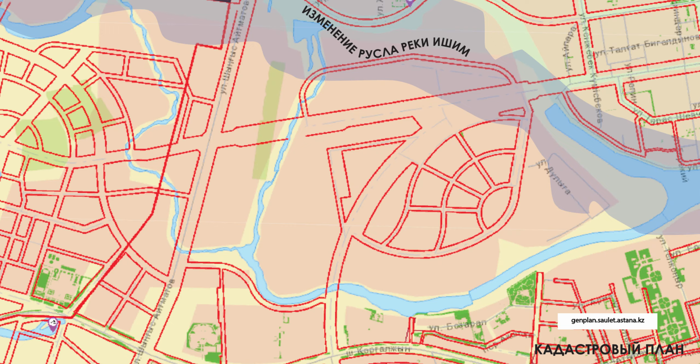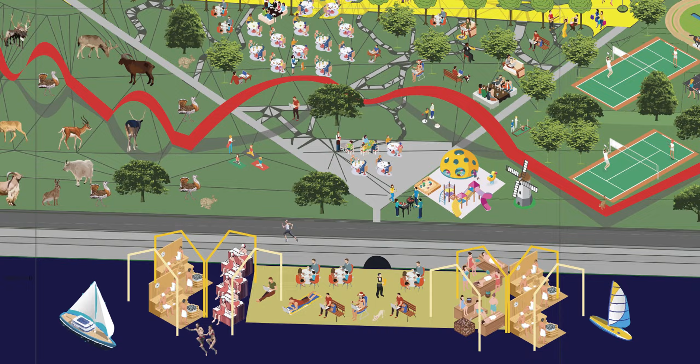If you compare the Google Maps graphical layer with the satellite imagery, and then with the red lines of the Astana master plan, you'll quickly notice that the street layouts and locations of water bodies differ among them. This is because recently the Ishim River's course has been altered and straightened in this area to mitigate flooding and elevate marshy terrain. The designated area encompasses 12.5 hectares next to Shevchenko Keshesi.

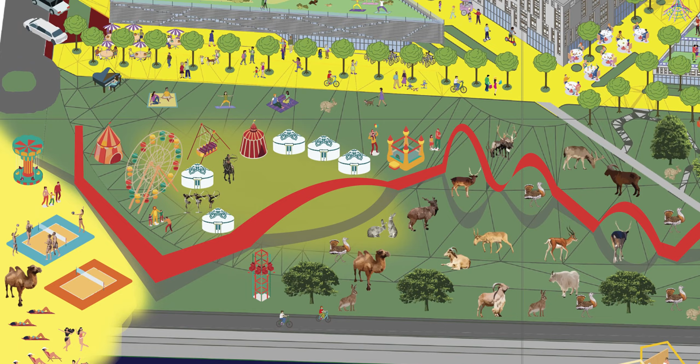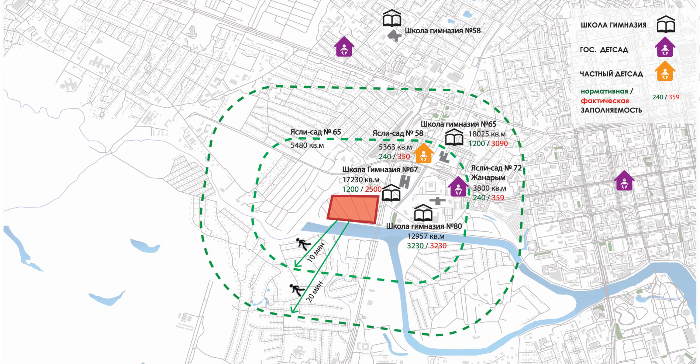In this newly developed area, school education options are quite limited, mainly because of its predominantly rural and industrial nature. The schools within a 20-minute radius of the site are already operating at 1.5 times their intended capacity. As a result, the project includes plans for an all-stage kindergarten and school to address this need.

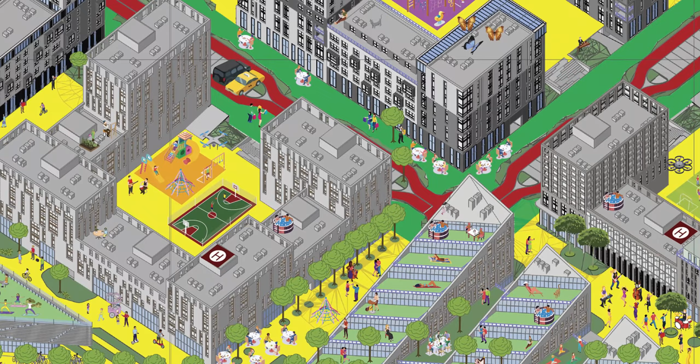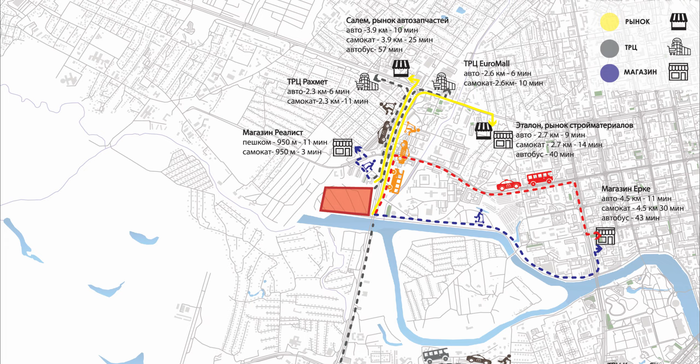The nearest food and supermarkets are at least 1 kilometer away and are more easily accessible by car than on foot, particularly during the 5-month-long winter. This necessitates the inclusion of various retail outlets in the project, ranging from small shops to a large mall.

Urban voids have emerged as the most significant revelation in urban studies. The site is essentially isolated from the rest of the city's vibrant areas by 8-lane highways, extensive parking garages, the river, and various private, fenced-off spaces.

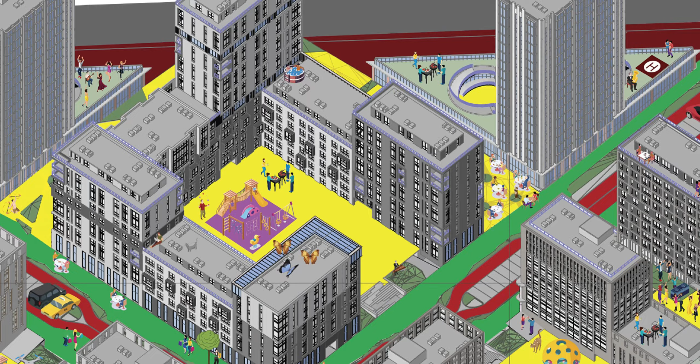Given the challenge of altering the car-oriented policy, the project aims to replicate the full spectrum of a modern city's diversity within the site itself, bringing a rich, vibrant life to its residents.

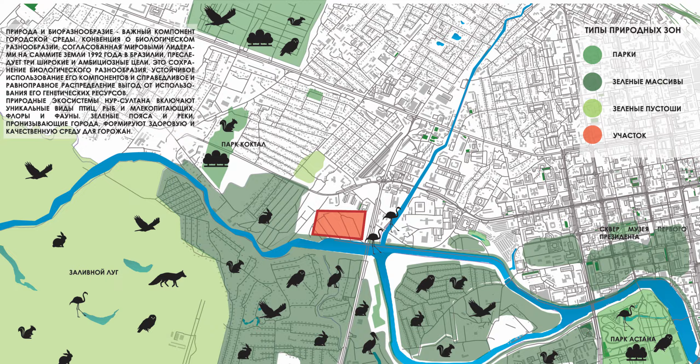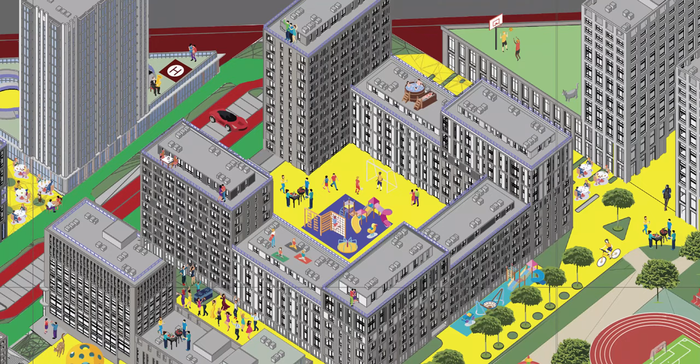The waterfront location is a key spot within the Ishim Emerald network, indicating that this area acts as a migration path for wild animals, especially flamingos. Implementing nature-based solutions will allow us to seamlessly incorporate natural elements into the project.

Marketing research has highlighted a diverse array of residential projects by class, showing that the area is on the outskirts and predominantly surrounded by affordable housing options.

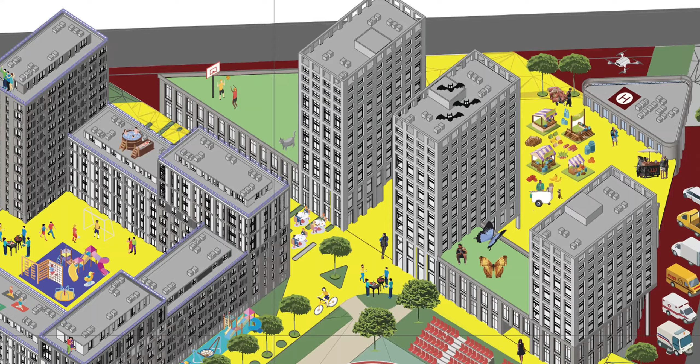The syntax analysis in the marketing study of similar real estate projects in Astana has identified 6 key blocks of values that the project aims to prioritize: location, safeguard, underground or built-in parking, and bicycle storage; landscape design, customized apartment layout, smart home system, eco and soundproof materials, low and middle rise, diverse facade design, panoramic glazing, multi-level water filtration.

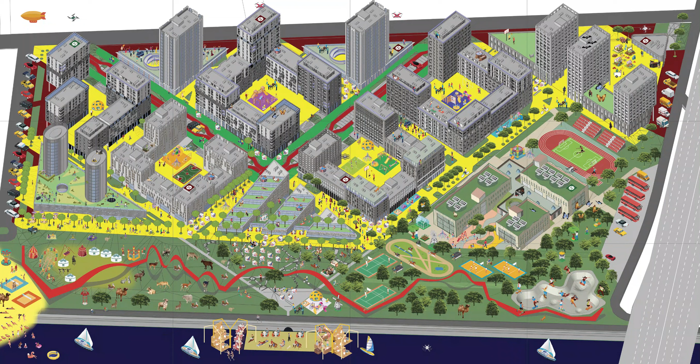Ceramic brick, swimming pool, fitness, pedestrian green zone, barbecue, and large lobby, kids playground and room, stroller storage, artificial pond, and boat pier, ground floor commerce, condominium management services, 24/7 concierge, recognition for design excellence, and community of wealthy neighbors.

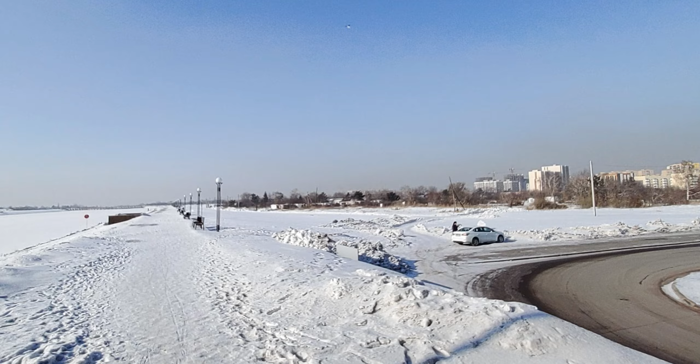The urban strategy of Riverside Astana is built around 7 core values: waterfront, cultural cluster, new home unit typologies, nature-based solutions, mixed use, micro-mobility, and underground parking lots.

Initially, the project started with a 9.2-hectare area, but we had to allocate 2.2 hectares of that for a public school. We then divided the remaining area into 6 full blocks and 4 half blocks, inspired by the famous block design of Barcelona. As a result, we achieved a floor area ratio, FAR, of 2.93, a density of 400 inhabitants per hectare.

137,000 square meters dedicated to residential spaces, and 16,000 square meters for commercial use, expecting around 2,800 people to live in this community.

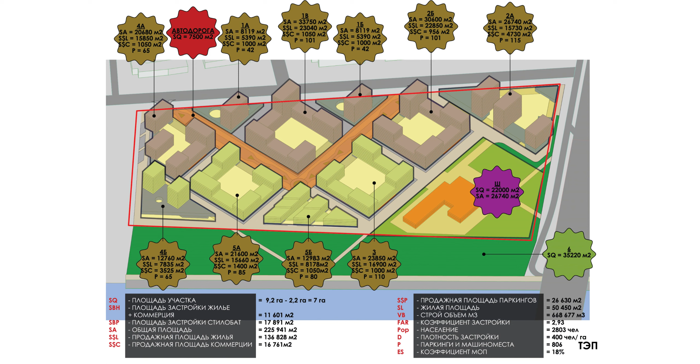The apartmentography scheme provides a range of options for residential units, categorized by area, class, and block. Meanwhile, the economy scheme visualizes a data of the expected economic value of real estate assets, sorted by type and block.

The construction development roadmap outlines the essential steps in business planning, including the allocation of shares in light of a gradual price increase, the phases of construction, investments, risk management, return on investment, and related development activities along the waterfront.

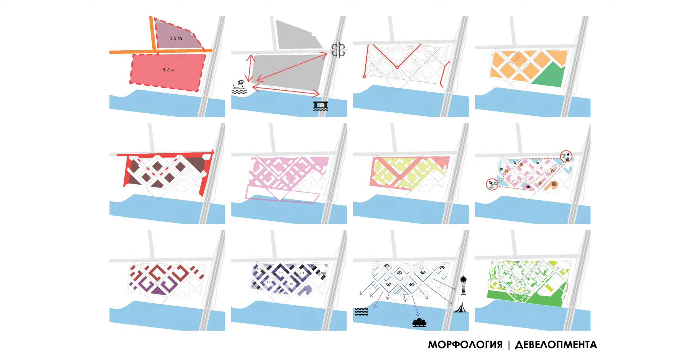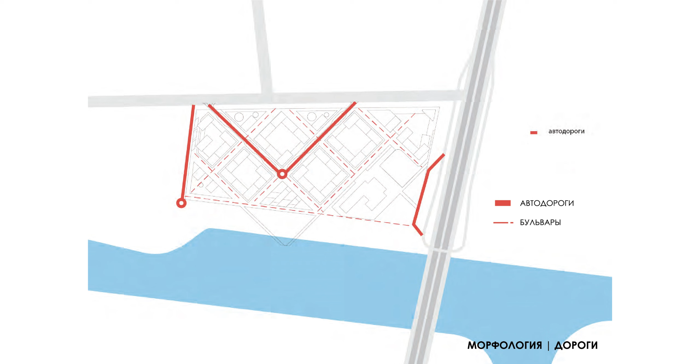Morphogenesis of urban blocks is explained in 12 steps. 1. The project boundary and its probable expansion northward. 2. Main connections. 3. Internal roads. 4. Blocks. 5. Car parking areas.

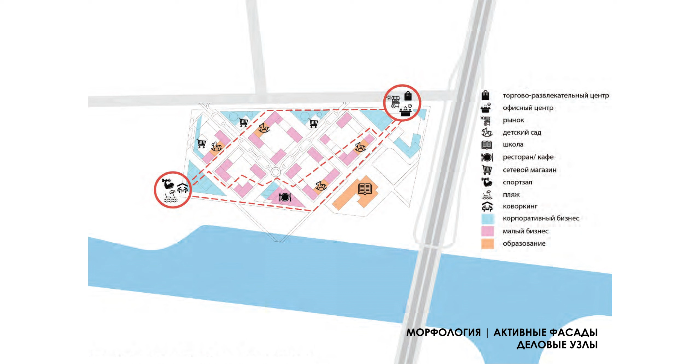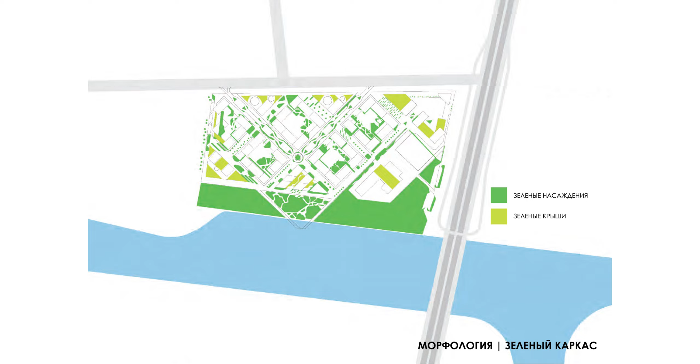6. Pedestrian areas. 7. Public and private space. 8. Active ground floors. 9. Real estate standards. 10. Floors. 11. Viewpoints to the water and downtown. 12. Green network. Thus we see the site master plan, and the zoning plan where commercial units are inbuilt in the perimeter blocks, and the wide waterfront includes temporary structures only.

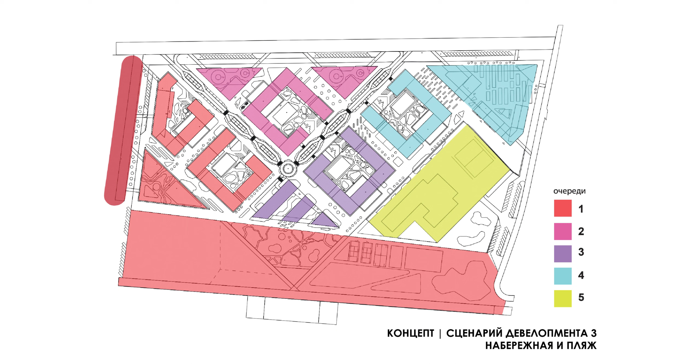The scheme of development priorities lays out 3 possible scenarios, starting from the northeast with the large mall, building from the north with the adjacent street and 3 high-rise blocks, and finally, from the west with blocks and the waterfront area. Plans for car transit and parking, micro-mobility, and nature-based solutions outline the key principles behind the urban design.

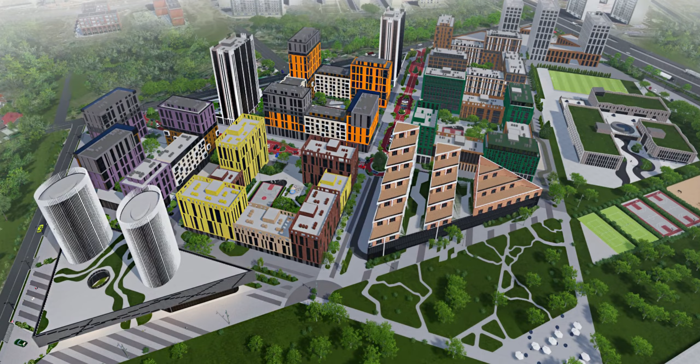Shadow analysis was instrumental in adjusting the building volumes, ensuring more sunlight could penetrate the blocks. Through visibility analysis, we identified multiple viewpoints overlooking the waterfront.

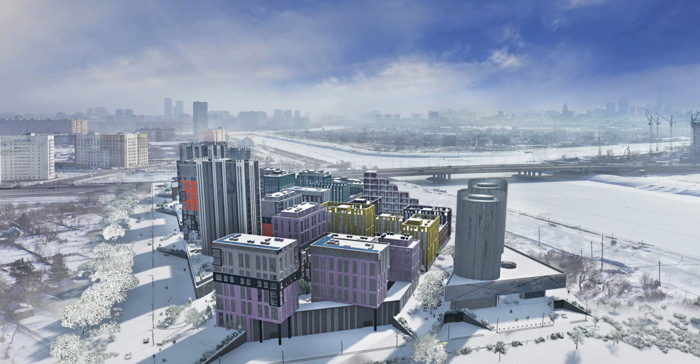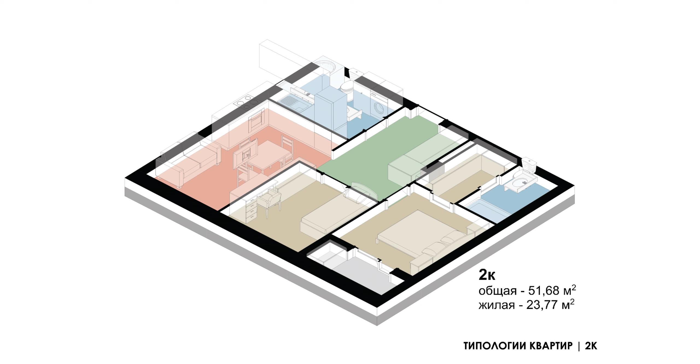In designing the pilot block plans, our goal was to minimize space waste of common areas and introduce a diverse range of apartment types. To accomplish this, we introduced loft units on the ground floor with small gardens, duplex apartments on the rooftops, and optimized the layouts of the housing units. Here, you can see the typical layouts for 1, 2, 3, and 4-room apartments, as well as loft units.

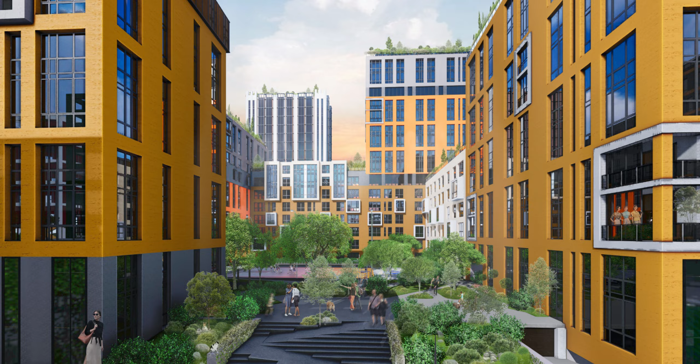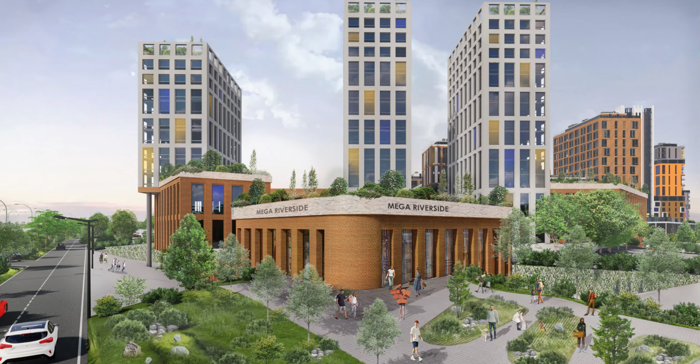The architectural outlook for the future neighborhood incorporates the use of prefabricated brick, concrete, and glass for the facades, along with a broad implementation of green roofs, patios, and enclosed inner courtyards. A unique aspect of the design is the provision for snow removal vehicles to access pedestrian streets and inner courtyards, as well as the efficient drainage systems for both roofs and street surfaces.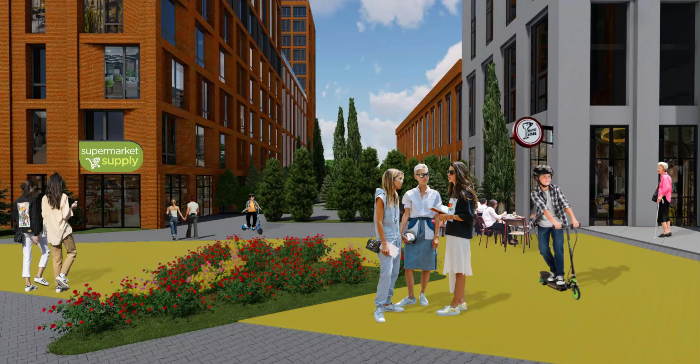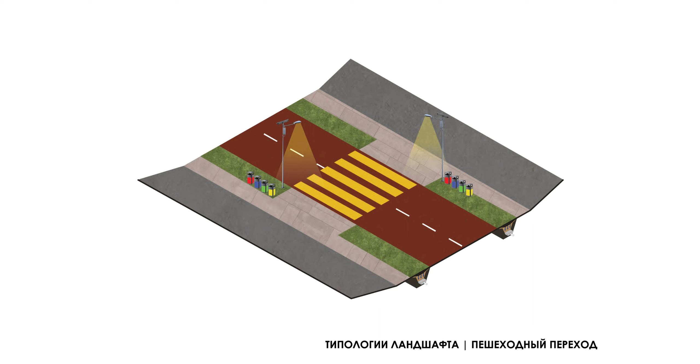The different color street pavements indicate the designated areas for vehicle movement and pedestrian use. The landscape typologies lay out the fundamental concepts of urban design: outside street sidewalks, guest parking lots, roundabouts, crossing of car and pedestrian street, driveway to underground car parking, kindergarten next to pedestrian street, pedestrian crossing, underground waste segregation containers, waterfront walkway, inner court sport fields, inner court playgrounds, and park cafe.

The street hierarchy helps visually distinguish the areas designated for walking, biking, driving, and parking. According to the urban strategy, this project should be developed over the next...